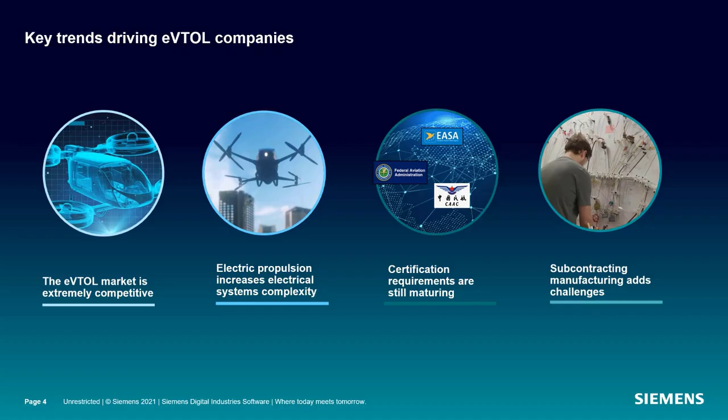Third, the acceptable certification procedures are still being defined and are evolving rapidly. Currently, no vehicles have received type certification, although many projects are in the works. Finally, achieving production profitability will be essential to these emerging organizations. As many will outsource substantial portions of the aircraft, subcontractors will need to quickly receive and act on evolving manufacturing information. Manual interpretation and data transfer will be an obstacle, as they are costly, time-consuming, and prone to error.

So, what are the implications of these trends for these companies? Let's dig a little deeper into each one. There are currently hundreds of companies trying to develop electric urban air mobility vehicles in order to provide air taxi services. The first few to reach production will win. Many of these companies are startups, relying on investor funding.

Large OEMs have also invested in the eVTOL market. They have established partnerships with these startup companies. Regardless of funding source, though, it is imperative that these companies demonstrate progress and minimize issues to retain investor and partner confidence. Intense competition exists between teams pursuing the urban air mobility market. Investors and OEMs will back the strong companies, those with a robust plan and a demonstrated ability to execute. Missing one significant milestone undermines confidence and could put an eVTOL company out of business.

eVTOL is a new type of aircraft. There are many risks to stakeholders as the technical unknowns associated with their mission are discovered and addressed in the development of the first prototypes.

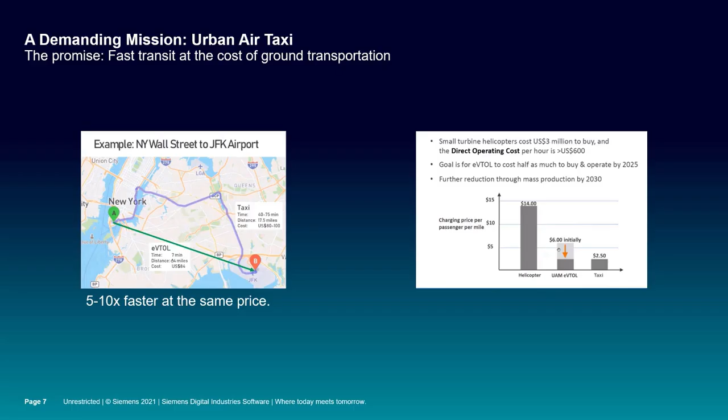eVTOL aircraft are expected to realize gains in efficiency, reliability, and maintenance that should turn into inherent operating cost advantages. They are also expected to be priced at half the cost of a small turbine helicopter. If they can achieve these things, it would make them initially cost competitive with ground transport in high-value markets, and later, after running down the production learning curve, competitive with taxis generally.

Now let's take a look at a typical eVTOL platform development program. It's easy to make some general conclusions right away. First, it's a long time between aircraft concept and initial production delivery and revenue. While on average it takes 7 years, it's not unreasonable to expect a single iteration in any stage to extend this to a decade.

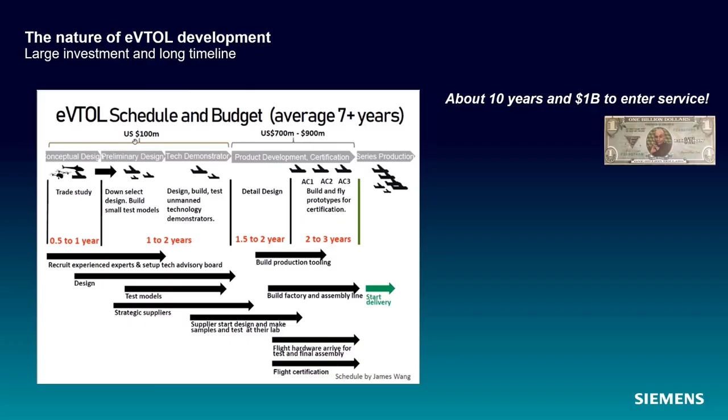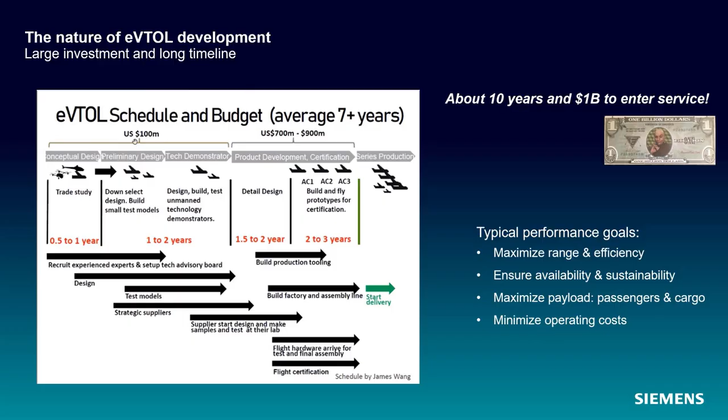Second, it's a costly endeavor, running between $800 million and $1 billion to get to first delivery. When you think of the performance that the platform must deliver, in the context of the many milestones shown here, you can start to appreciate the pressure even one development hiccup can place on these teams.

Now let's get back to the fact that eVTOL aircraft are all electric. eVTOL aircraft rely on electrical power for propulsion, adding a new layer of difficulty over traditional aircraft. They also have a high level of electrical, electronic, software, and communications network content. Together, these result in an EE system of high complexity. At the same time, performance margins are thin due to battery limitations. Battery energy density is low compared to jet fuel and is not increasing fast enough.

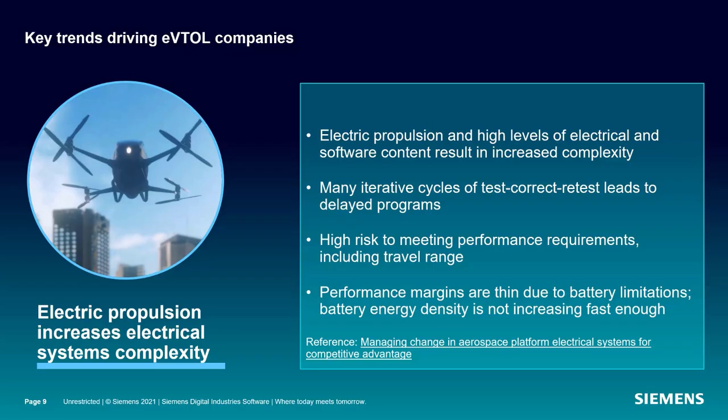The startup nature of these companies means that they are working in a fast-paced environment with a lot of change. It can be difficult to manage the complexity of the systems involved. This may lead to many additional iterative cycles of design, test, correct, and retest. This complexity, coupled with energy density limitations, poses a significant risk to meeting performance requirements, including travel range.

Integrating systems like these has traditionally been done using manual approaches that employ a collection of disconnected tools and rely on the attention and accuracy of tens to hundreds of subject matter experts. In the past, aircraft programs have been able to avoid major problems because EE systems were less pervasive, and therefore there was a lower probability of EE systems problems arising. With fewer EE integration problems to tackle, prototyping and lab testing could be used cost-effectively to identify and resolve these problems.

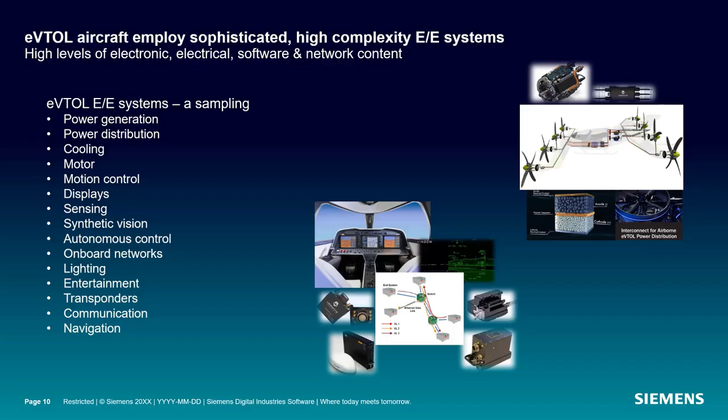But no longer. With the increase in EE system content and complexity in modern platforms, manual approaches are undermined by human error, and integration issues can multiply. Traditional prototyping and lab testing is overwhelmed in multiple expensive iterations of design, build, test, and fix. The likelihood that a major problem will manifest as a significant program issue has increased significantly.

You can see here that liquid fuel enjoys a 50-to-1 weight advantage and a 13-to-1 size advantage. Furthermore, unlike liquid fuel, batteries don't get lighter as their energy is consumed. This means that eVTOL aircraft are often limited to shorter travel distances and briefer flight times. This makes selecting a battery with the right, usually highest, energy density essential to commercial viability.

But just as important is optimizing the platform's EE system and the infrastructure that supports it. Minimizing EE system power consumption and reducing the weight associated with fixturing, wiring, and cooling, together with battery selection, can mean the difference between an interesting concept aircraft and a commercial success.

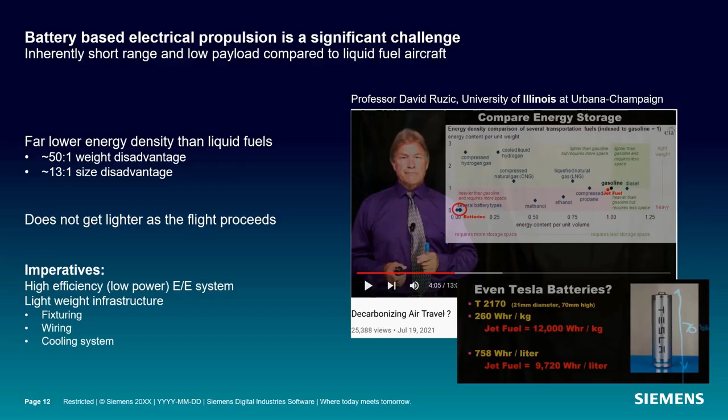Next, let's consider the challenges associated with eVTOL type certification. Currently, no vehicles have received certification, although many projects are underway. The certification environment for eVTOL platforms is currently being defined. It is evolving rapidly. For example, the FAA has only recently published a proposed concept of operations for urban air mobility. The regulatory agencies are also working through certification details unique to eVTOL, such as electrically powered vertical lift. New design and certification guidelines are appearing well into existing development programs.

Furthermore, these initial type certification events come at a time when the regulatory agencies are paying much closer attention to the details of each OEM certification process. They are increasingly enforcing the more stringent regulations associated with aircraft EE systems, including the more stringent EWIS regulations. Waivers and exceptions are hard to come by. Anyone seeking to certify an eVTOL aircraft needs to be able to respond to these changes quickly, generating and reporting supporting compliance evidence in a way that allows the regulatory representatives to rapidly assimilate it for compliance determination. Data management and design control are essential.

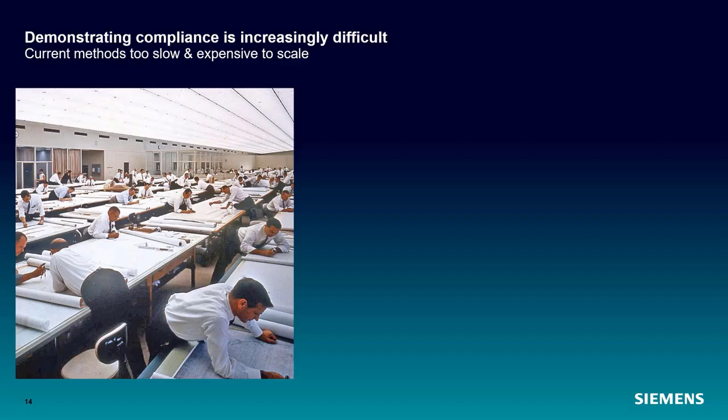Unfortunately, current compliance analysis and certification methods were also developed in the era of simple EE systems. They handle data in a fragmented way, with it being held in multiple drawings, documents, spreadsheets, and databases. They also use multiple disconnected, often very old tools. Many of these are bespoke internal tools written years ago in Fortran. To conduct the necessary verification, checks, and analyses, data must be re-entered manually many times. Then their results must be massaged into reporting formats that can be consumed by the relevant DERs or ARs.

It's not that we can't demonstrate compliance with today's approaches. It's that they are onerous, slow, and expensive. We can't afford to perform the bulk of the required analyses and checks more than once. It can take weeks to report on the impact of a single design change. So when a compliance analysis iteration arises, whether from a desired design improvement or from a changed regulation, it blows our schedule and cost budgets.

We checked with engineering teams charged with this work, and here's a sample of what they reported. One person said, "I never know if I'm analyzing the current data." Another reported, "There are a lot of findings in peer review due to errors." Yet another one said that sometimes we forget to analyze entire buses. And finally, one said that we spend weeks writing the report only to find that the references are outdated. With multiple compliance analysis and reporting iterations expected as regulations for eVTOL aircraft change and evolve, current methods add risk to our ability to achieve type certification in time to be a viable player in this market.

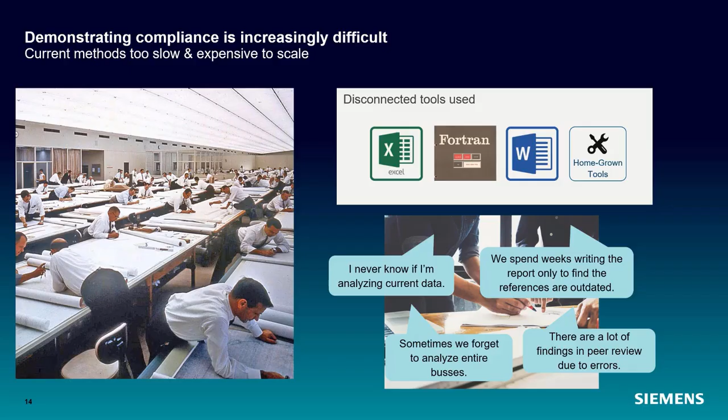Finally, let's turn to manufacturing. Companies entering this market are focused on innovative solutions and time to market. Many of them are not planning to set up their own manufacturing facilities, but rather will subcontract the work. Ideally, they could release mature, stable designs, production data, and orders to their contract manufacturers, who could in turn then invest in production tooling and factory upgrades that they could use for the duration of the production run. Unfortunately, this is unlikely, as change in aircraft design, including the EE system, is expected to be the rule rather than the exception.

The most fundamental drivers of this change will arise from discoveries during detailed design, prototyping, and initial flight test. Some will be opportunities to improve market position. Others will be necessary to address late-breaking problems found in integration and test. Addressing many of these will not be optional. They will result in new production data packages delivered to subcontractors. Responding to certification issues is the second fundamental driver of these changes. Here, eVTOL OEMs will need to respond to the changing regulatory environment and address compliance shortfalls found during their test and approval cycle. Again, most of these will not be optional, and many will result in design and production data changes that will impact subcontractors.

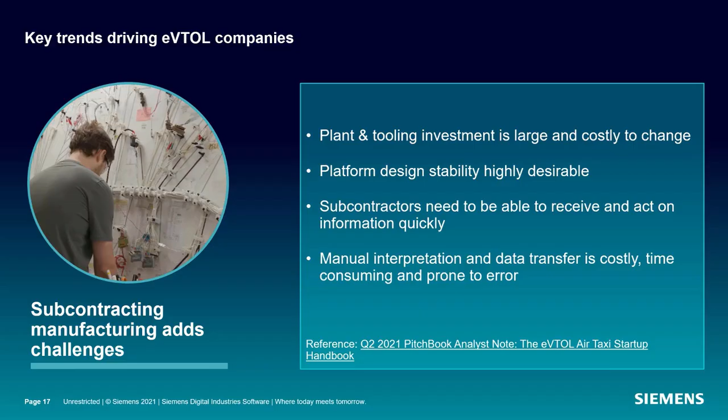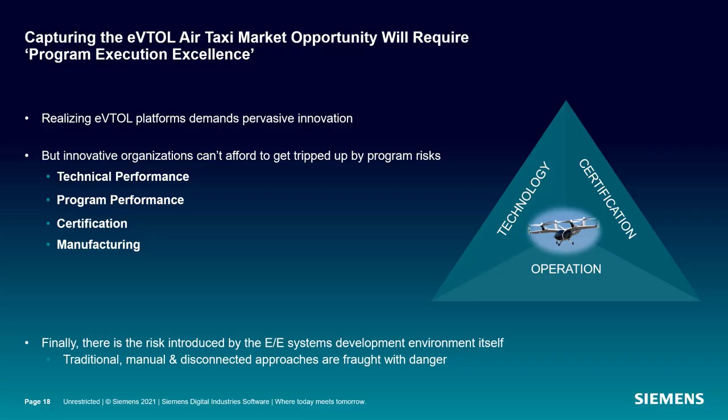Companies competing for the eVTOL market cannot afford to get tripped up by the challenges and risks I've outlined. Excellence in executing all these aspects of the platform and corporate lifecycle is essential for company viability, as market acceptance of these new aircraft is not guaranteed. To minimize these risks, forward-thinking eVTOL companies are following in the footsteps of other OEMs and adopting a model-based EE systems development approach. So how can eVTOL companies respond and be successful?

So, just what are the characteristics of a successful EE systems development solution? First, successful EE systems development solutions leverage the digital twin to identify and prevent errors, analyze performance, and quickly complete trade studies. This reduces risk early in the design, resulting in reduced cycles of trial and error. Second, they employ design tools that have strong multidisciplinary integration. This allows development experts from various electrical and mechanical implementation disciplines to collaborate in real time and as the program progresses.

It accelerates the design process and eliminates integration errors from the start. Third, they connect the certification and design teams through a digital thread. This allows certification analysis and reporting to be derived directly from a configuration-controlled digital twin of the EE system, no longer subject to the delays, errors, and confusion that arise from manual data communication. It also provides digital traceability to design and requirements data.

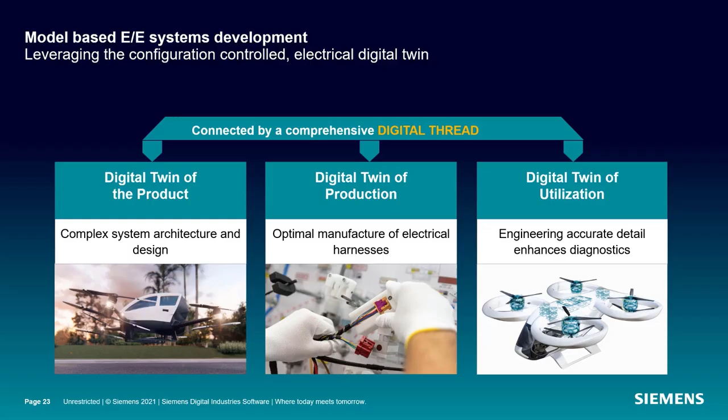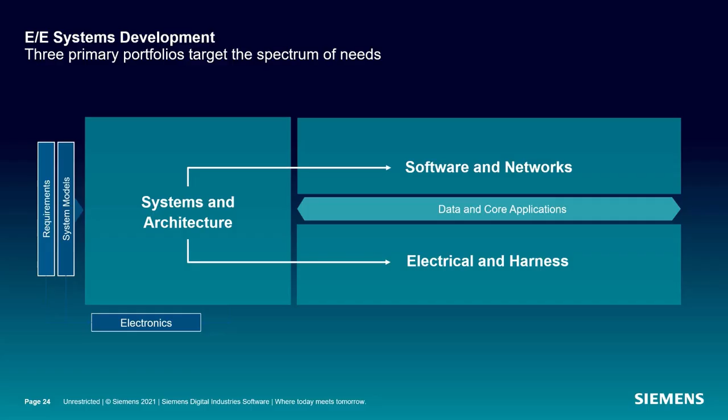Capital automates the creation of the EE system's digital production and utilization twins. It uses generative algorithms to derive these directly from the released version of the EE system. Capital is comprised of three major blocks: systems and architecture, software and networks, and electrical and harness. These enable model-based EE system architecture development, including optimal allocation of hardware and software functions.

They also transform these system models into end-to-end optimized electrical, electronic, network, and software outcomes. Upstream, they link to platform-level requirements and multi-domain system models, ensuring that the EE architecture remains aligned to the overall system requirements and constraints. Downstream, they provide executable EE system descriptions for overall system verification and validation.

At each level of the EE system hierarchy, Capital helps those responsible for architecture design and integration understand what's expected of them, explore and optimize architectural possibilities before releasing development direction, share design intent with the EE implementation teams, and determine if the implementation team has contributed what is needed.

Capital includes a complete flow for electrical wiring interconnect system development. This includes EWIS design and analysis, harness design and manufacturing engineering, compliance analysis, tooling, that is, form board design, manufacturing data prep, work instruction generation, publications generation, and maintenance support. It also includes a complete avionic networks design and verification flow. Both flows exploit Capital's digital twin and digital thread to enable automated, correct-by-construction generative development.

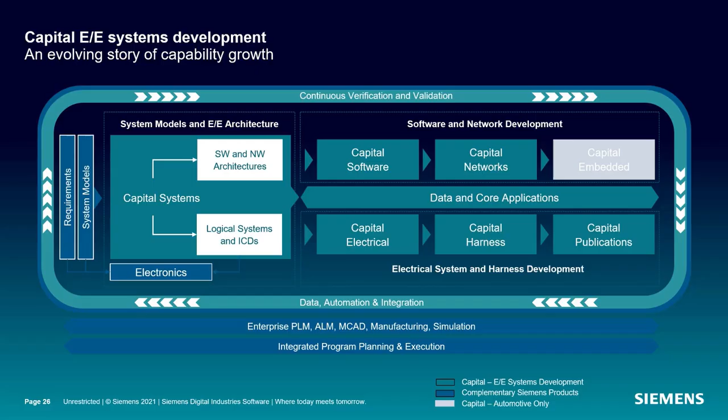The environment also includes domain-specific data and process management, while being natively integrated to the Xcelerator PLM data backbone. It enables EE system implementation in the context of the platform's physical environment through mechanical co-design. Rather than continue to tell you about it, let's take 2 minutes and watch it in action.

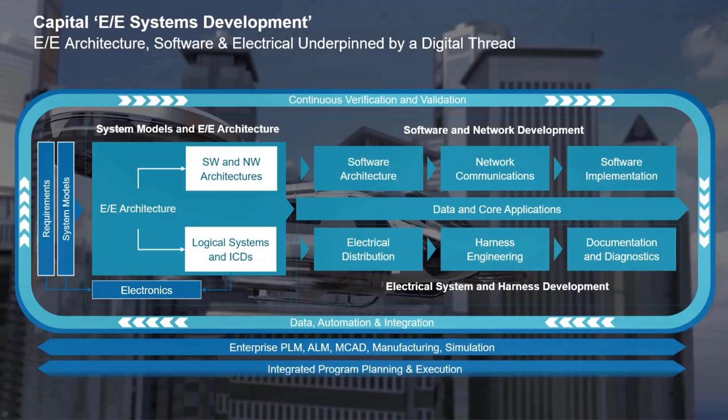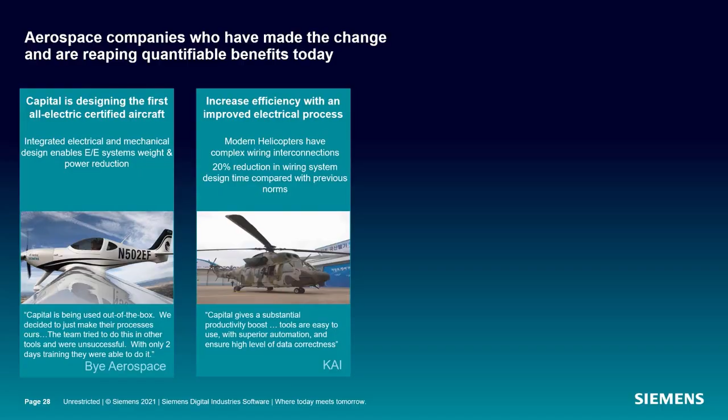Perhaps Bye's experience is the most relevant to this audience. In a recent presentation at the 2020 Siemens Realize Live event, Jim Forrester, head of Bye's engineering team, made the following comments. Capital is designing the first all-electric certified aircraft. He was referring to the Bye eFlyer. The Capital NX integration is very good. Capital is being used out of the box. We decided to just make their processes ours. The team tried to do this in other tools and were unsuccessful. But with only 2 days of training in Capital, they were able to do it.

Capital exceeded our expectations. And if you look carefully on this slide, you'll see the primary value they are deriving from Capital. It is very germane to the eVTOL challenge. They are using Capital to perform integrated mechanical and electrical design to optimize the eFlyer's EE system for weight and power.

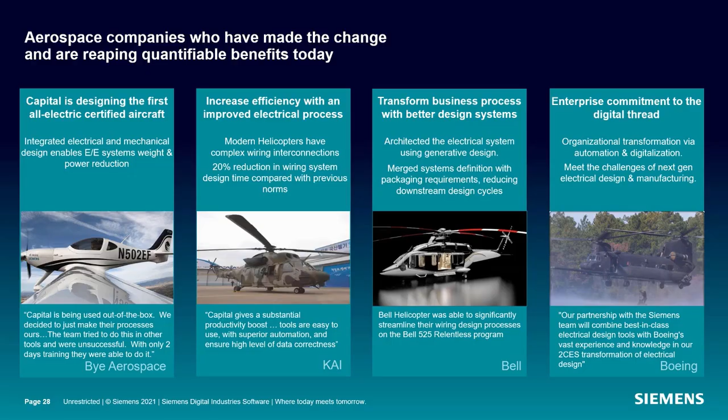And that concludes my presentation for today. I thank you for attending, and I invite you to participate in the ecology of industry leaders who have adopted Capital and model-based EE system development.